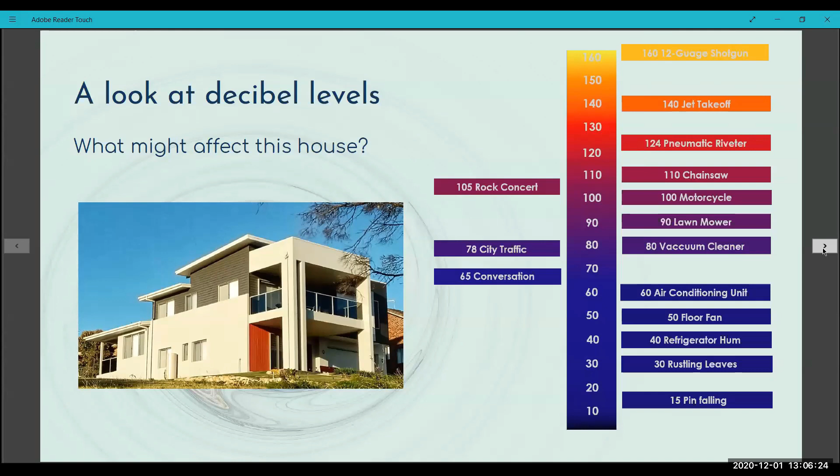The RW information is the same across the board, whether it's an aluminium window, a timber window, or a UPVC glazing. You'll notice that the RW figure has a couple of other numbers behind it in brackets.

That's referring to the frequency. So I'm going to do a little experiment with you now so you can understand exactly what frequency is.

I'm hoping you're all at home in a nice office tucked away where no one will hear or see you, so there's no embarrassment. Take a couple of fingers and place them against your throat and make a high-pitched sound - ah. I'm not going to make it too high, I don't want to deafen you. And then keeping your fingers in position, now make a really low-pitched sound - ah. Between those two, you should be able to feel the difference in the vibration in your throat, and that gives you a bit of a concept of what frequency is like.

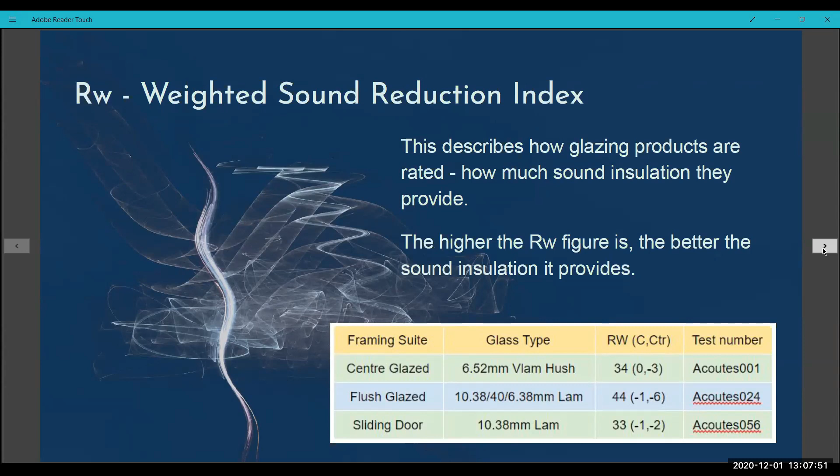In a sound wave, the frequency can be distinctly different. If you have a look at this information, you'll see that the frequency of sound changes over distance, as in a jet engine, and the proximity of where you are to it.

Now, in a sound wave, sound is actually on the global agenda due to health and well-being in general. Any long-term exposure over 85 decibels, which is about halfway between a vacuum and a lawnmower, is actually hazardous for your ability to hear - that's over the long term.

I think we've all visited minimalistic, sterile restaurants and cafes where you've got nothing on the walls, chairs that scrape, cups that clink, coffee machines that whir. Between that and a few jovial customers, it's really hard to hold a conversation. So what I'm trying to do is bring awareness generally to everybody to make a difference when they're actually looking at design.

There are Australian standards that discuss nominal acoustic protection. In New South Wales, it's suggested that the decibel rating for a bedroom is no greater than 35 decibels at night and 40 decibels for other areas of the house. This is just a guide, but one we can all bear in mind with design.

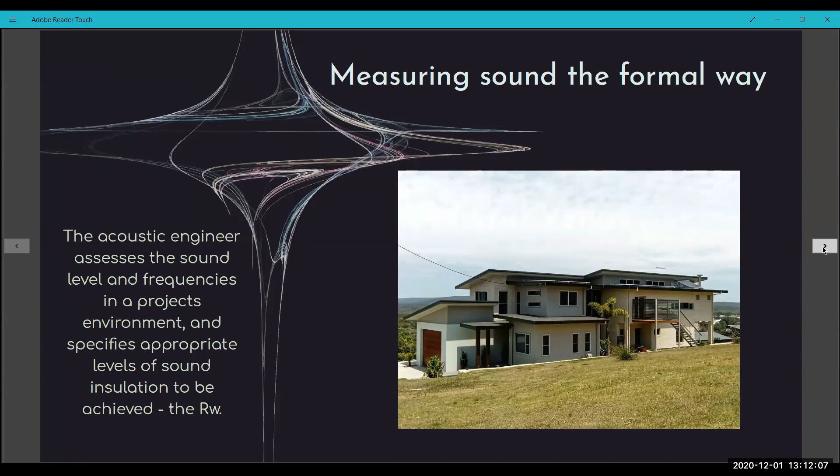So that figure will reflect, okay, you've got 2 figures then. You have the figure for the product itself, the glazing product, and you have the figure the engineer is requiring, which will reflect the RW and the CTR factors, and then you match the product up with the project you're working on. There is a standard that governs the testing, AS 5218, and it's the only standard currently affiliated with acoustic controlling and glazing, so it's one to be aware of.

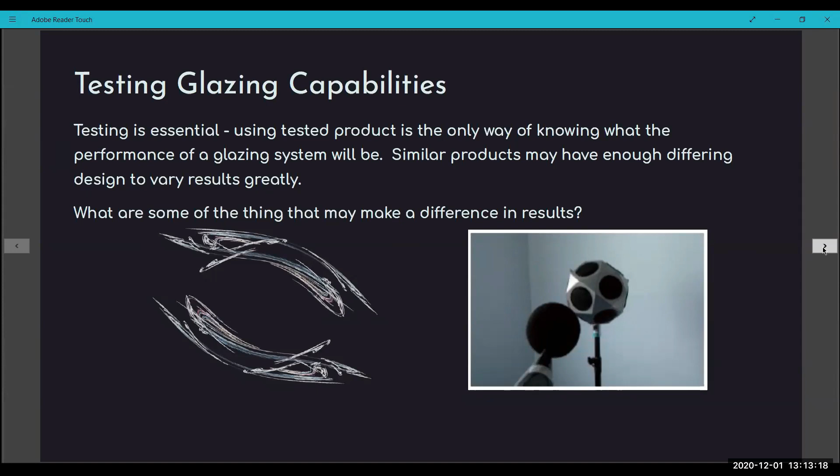In the initial stages of design, it is sensible to be aware of the appropriate frame types and potential glazing options. Think about a project you're currently working on. What do you think adds to the glazing's acoustic ability, or its weak points, that stop air movement getting through gaps and weak areas of design? Think about the frame material and the type of frame, the material wall thickness, the solidity of a frame as opposed to insulative chambers—both can be quite insulative.

The seals they use, whether it's gaskets, wool piles, or wet seals, the installation of glazing and drainage design—often there's little air gaps there that sound can get through. And the glass type, which Greg's going to talk about in a little bit, but I'm just going to talk a little bit more about the frame options.

So when it comes to glazing, a positive close is where one surface will close against another, flat to flat. This allows for better sealing and air isolation. If you think about sliding windows and doors or double hung windows, the sliding action doesn't allow them to close flat on flat, so unless they're specifically acoustically designed, that's going to be a problem area.

Then you've got hinge doors, not pivot doors, but hinged or bifold doors. They will close against an area, but there's still room for sound to get through. Awning and casement are the strongest operable glazing options, and if you consider the size of them, that gives you an indicator of why they are better at keeping sound out. The best of all that you could choose is fixed glazing.

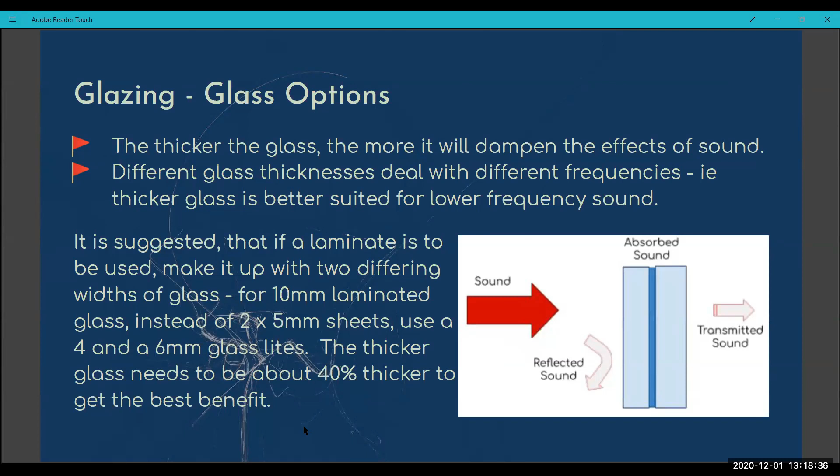Just to carry on from what Larissa was saying, there are a number of products that can meet these sorts of needs. Within our suite at Viridian we've got our acoustic VLam Hush, so a hush laminate is what we call it, but of course there are a number of other products across the market that will also meet that sort of requirement.

Basically it's got a specialized interlayer between the two pieces of glass that is laminated into the panel, so it holds the two pieces of glass together. That can become available in 6.5mm, 8.5mm, 10.5 or 12.5mm, and that's in an annealed format. In other words, it's two pieces of float glass, not toughened, that are laminated together by that 0.5mm special acoustic PVB interlayer.

So that can be very, very effective at cutting out noise. Now, another very effective way, as Larissa mentioned before, is to create a gap between glass, and that's where you can use an insulated glass unit. So that's a specially built insulated glass unit, and the bigger the gap, the better the acoustic performance. Of course, you can also use secondary glazing options, where you've got the outer glass framed in, then a 100mm gap, and then another piece of glass glazed on the inside of the area. So basically you're creating a large air gap between the glass, which creates really good sound insulation.

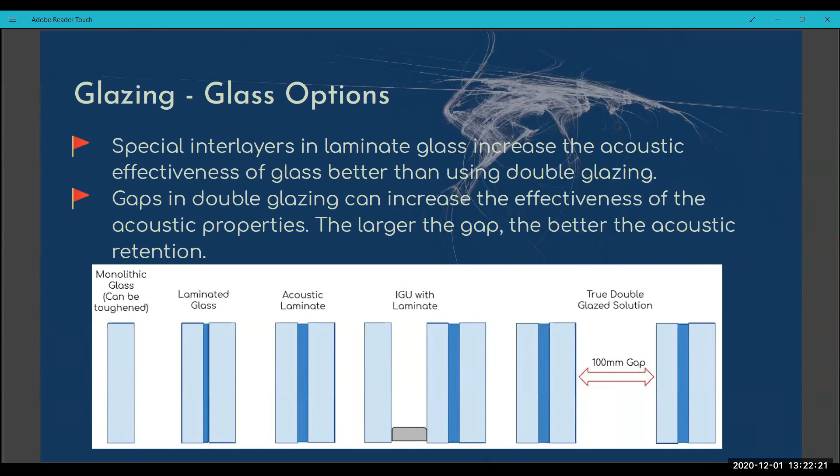Just so you're aware, there's some really good information available on our website that can help you work through a lot of the glass options available to you, at viridianglass.com. That can be very helpful to work through what glass options are available and the different performance data associated with them, whether that be single glass, laminate, 6.5 millimeter as an example, or going into the double glazed IGU unit. All that data is available on our website for easy access.

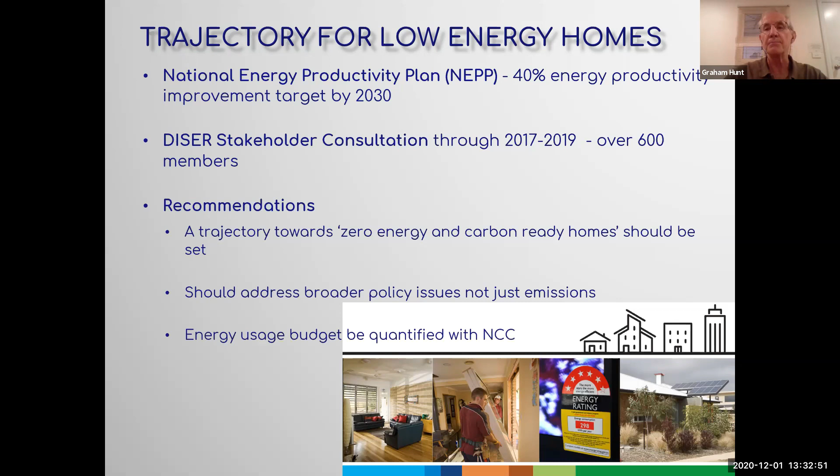That trajectory should address broader policy issues and not just emission reduction. So other concerns here were about the cost of energy to consumers, about health and amenity issues, which is becoming a more crucial thing as we face the stresses from climate change, the heat wave we're going through at the moment. It was interesting, there was a report on the radio yesterday that the ambulance service over the weekend were as busy as they were at Christmas or New Year. It's a little known fact that deaths from exposure to heat is one of the highest killers we have. And so there's a concern to improve the performance of housing to minimise those impacts.

The third recommendation was that the energy usage budget be quantified within the National Construction Code.

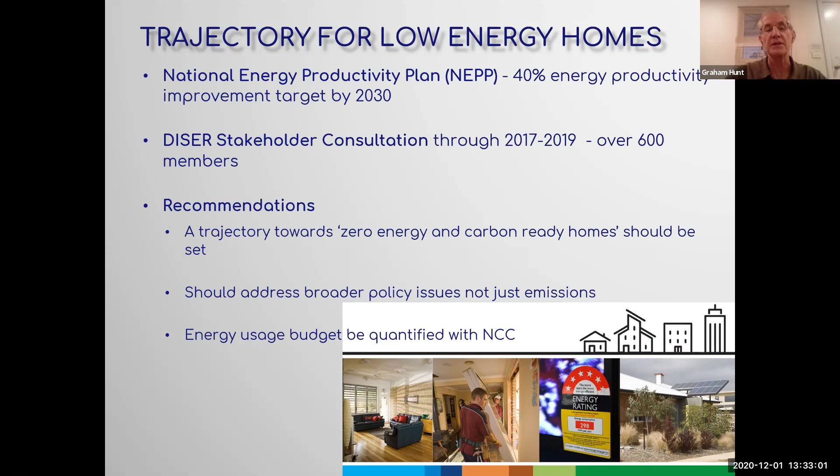COAG, which no longer exists, is now replaced by the National Cabinet, but in December 2018, they adopted the recommendations of the trajectory, and there's a report about how it applies to homes. It also covered commercial buildings and new homes.

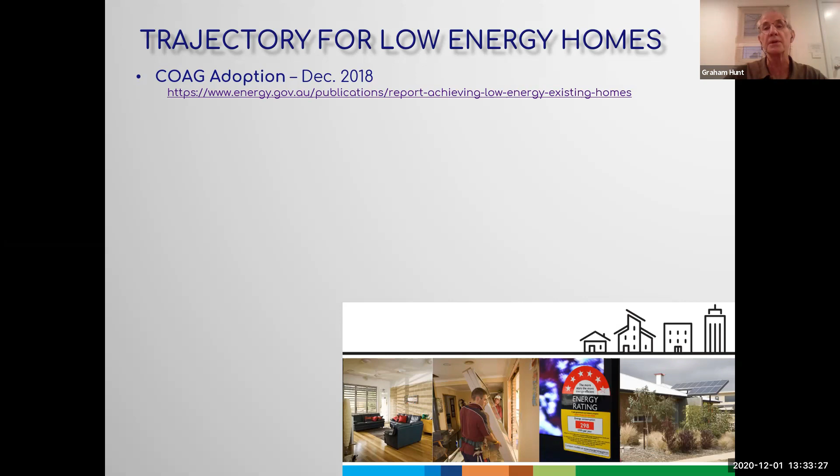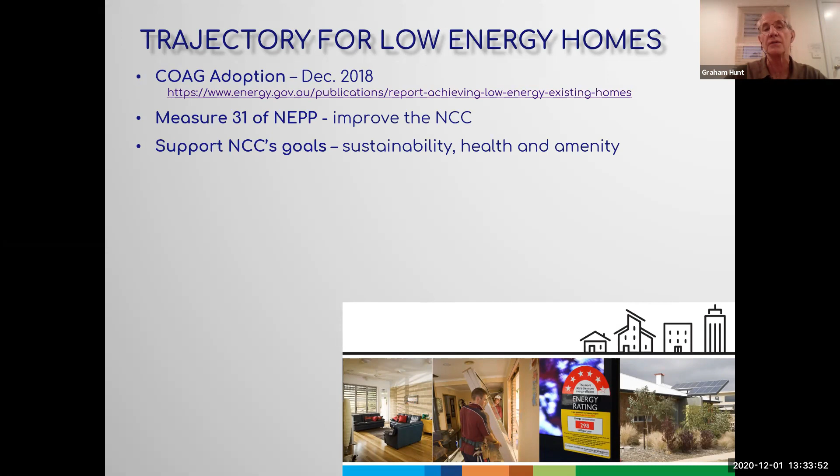It's a result of Measure 31 under the National Energy Productivity Plan, setting the agenda to improve the NCC to achieve the 40% productivity improvement. This is in line with the overarching National Construction Code goals of sustainability, health, and amenity.

There was a lot of work done prior by ASBEC and Climate Works as background for the trajectory, and I've got the references there for those two reports if you want more background. I can make a copy of this presentation available so people can access those links.

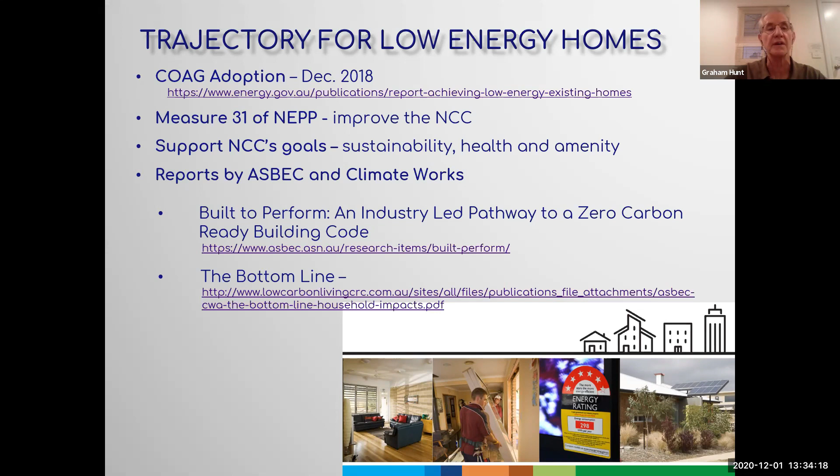Regarding the proposed changes that are going to occur in 2022, because of the extent of the changes they have been delayed. Normally they occur around May in the calendar year, and that has been delayed to September 2022 because of the amount of development work still to be done.

One prime reason for these changes is that there's been no real increase in the stringency of residential energy efficiency within the National Construction Code since 2010, which is 10 long years. That's when the 6-star NatHERS requirement was introduced. So there's been a strong feeling through industry and the community that this increase is long overdue.

In mid-2019, the Australian Building Codes Board released a scoping study of how these changes could be incorporated into the NCC, and there's a link to that study there. The outcome is primarily that new dwellings will be aiming to achieve net zero regulated energy, as well as a minimum 7-star NatHERS rating.

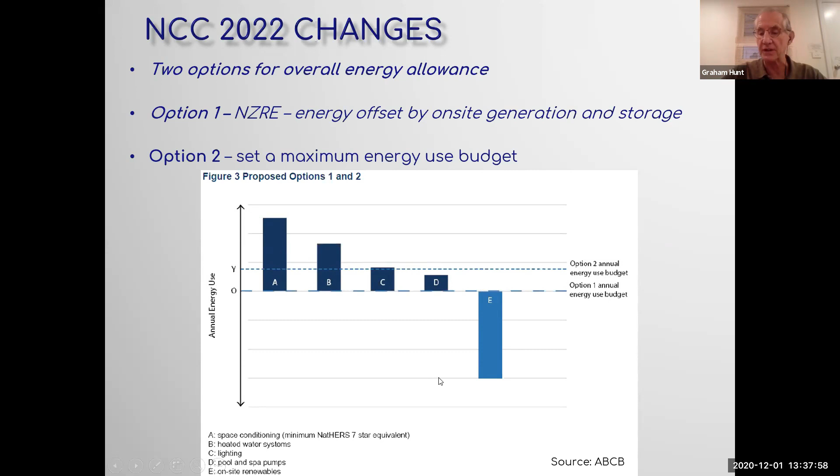So allied with adding all these energy assessment requirements into the NCC, it was realised that the Nationwide House Energy Rating Scheme needed to expand. Currently, it only rates the building envelope, the thermal performance of the building envelope. It doesn't consider or model the overall other energy uses within the home.

So the NatHERS tools are being expanded to include these whole of house elements. There already were some tools available. Practitioners within New South Wales who are familiar with BASIX would be aware that it already covers energy use in terms of the selection of hot water, heating and cooling systems, lighting options. So it has been considered as one model.

The AccuRate CSIRO NatHERS tool is being expanded to include these other elements. Currently the testing of those tools is underway. The other thing that needs to occur is the NatHERS assessors need training in these new modules of the tool. Currently the strategy and courses for that training is underway, and that training will occur next year and early into 2022.

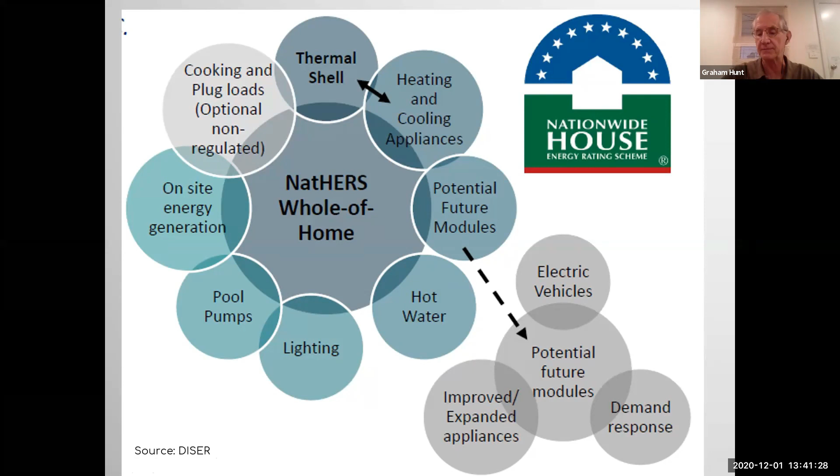Just quickly, in terms of some of the appliances and things you need to consider. Obviously there's a range of options with hot water, but you're going to get more benefit in your assessment if you choose a more efficient system, such as solar hot water, evacuated tube, or a heat pump. Where the hot water system is placed within the building can affect the efficiency in terms of minimising pipe runs, but also whether it's a good position for the performance of the system.

You need to think about hot water pipe insulation, something which is quite often overlooked in the residential area. And selecting efficient sanitary fixtures, efficient shower heads and so forth. They have developed a lot in recent years. You can now get quite good 4-star shower heads, which are a rain shower head.

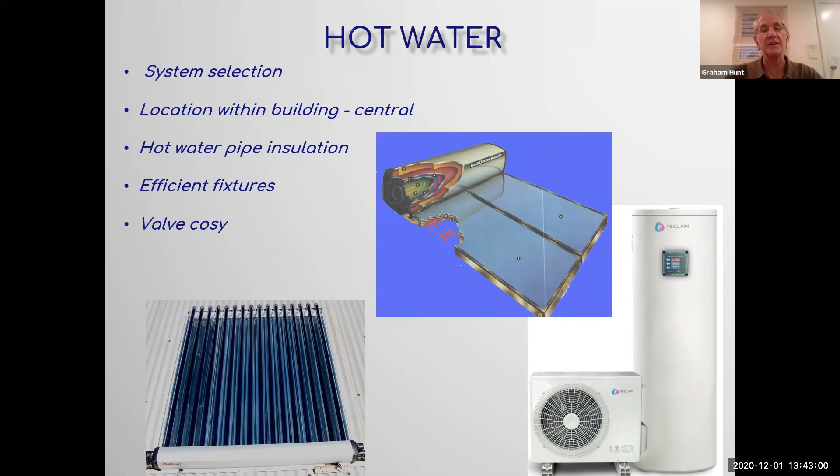A valve cozy is a concept - it's an insulated cover to go over the pressure relief valve of a hot water system or tank that can lead to heat losses. And you also need to think about hydronic and pool heating and the efficiency of those systems for heated water systems.

Heating and cooling, this is a big area, but the first thing you can do is design an efficient building and get a good NatHERS rating. I spoke at the conference about going beyond the minimum and trying to achieve 8-star designs or more. The benefit of doing this is that you then don't have to put in as big an air conditioning or heating and cooling system, and it will run much more efficiently.

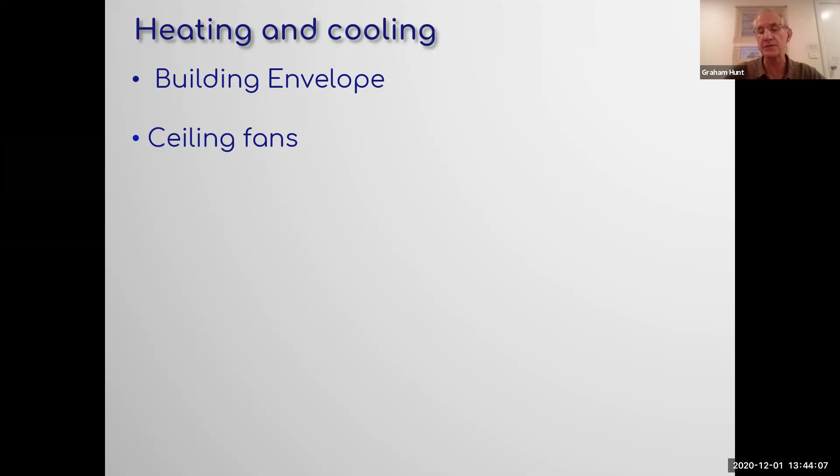The benefit of ceiling fans in tropical and warm, humid climates is very beneficial, and even in all climates for summer cooling. There's more under the new deemed-to-satisfy provisions in the NCC 2022 - you'll see ceiling fans probably figuring more prominently.

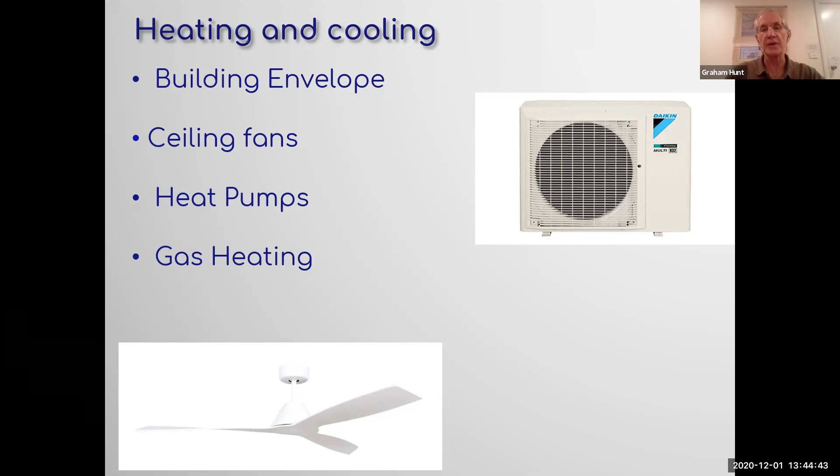Heat pumps, we're very familiar with these, but they are very efficient in that they take energy out of the air, and in terms of their conversion of energy to heat, are very efficient. Gas heating is still used a lot in southern states, and the efficiency of newer systems is quite good, but you have to ensure that they're installed properly, especially the ducted systems.

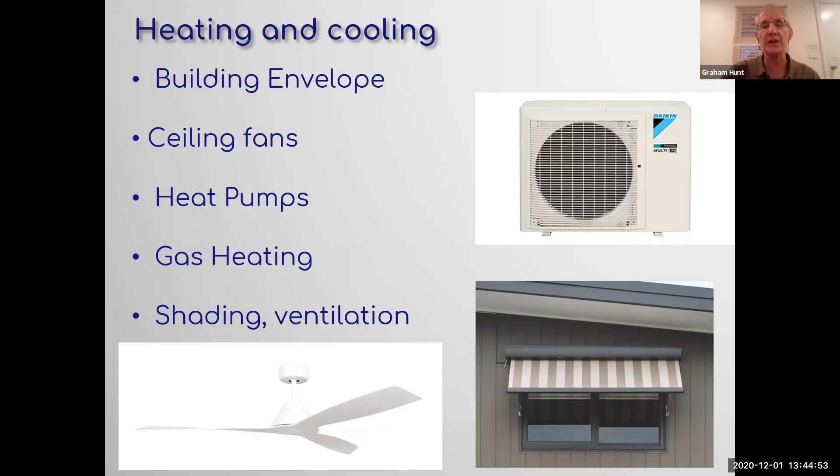The use of shading and ventilation can certainly help to reduce the demand for cooling. Pools and spas will also factor in.

Be aware that pool pumps are going to be energy rated from next year as a minimum. They'll all be rated, so you'll be able to choose quite easily which are the more efficient pumps, and the efficiency of these pumps has expanded significantly during the last decade.

We did discuss the heating options. Perhaps using heat pumps is a consideration, especially if you're needing to install a PV system to meet your energy budget. These can work in conjunction with a heat pump to ensure that you can get a heated pool with minimal emissions and minimal cost.

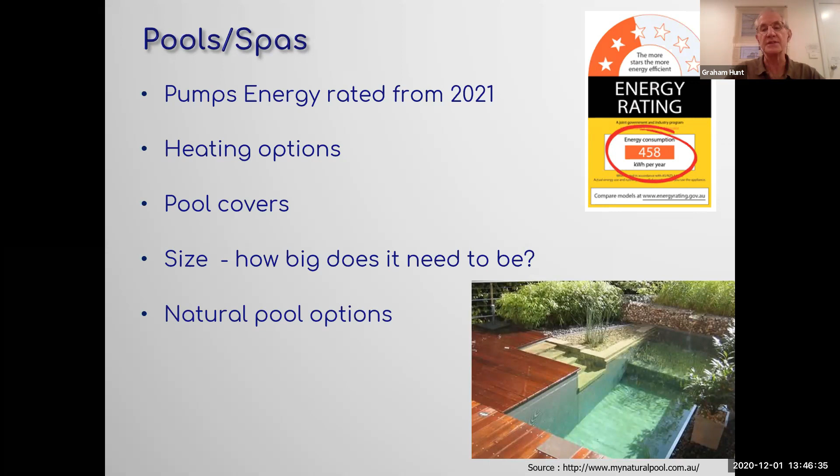Pool covers help to contribute to minimizing evaporation and keeping the heat in, so it's not escaping. And consider the size of a pool, because obviously the bigger it is, the more energy it needs to consume to just circulate the water, but also for heating. There's also now quite a few options around natural pools using reed beds and other options, which can reduce the energy demand and be better for the environment.

I'll just briefly cover a discussion about choosing between electric and gas appliances. I've borrowed this from Renew - I'm not sure if you're familiar with them, they used to be called the Alternative Technology Association. They publish the magazines Renew and Sanctuary, and they've done a lot of research about the benefits of converting to an all-electric home. This is just results of some of their research.

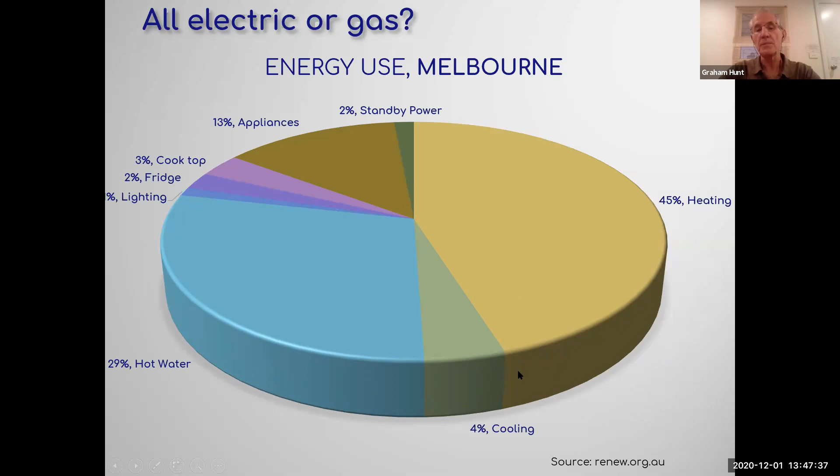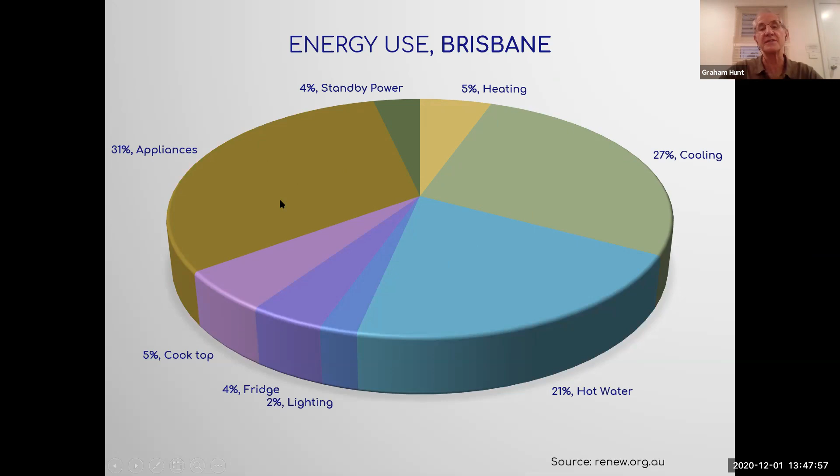This is a summary of overall energy use in a typical house in Melbourne, and you can see that heating is the biggest component, along with hot water. The next one is a typical house in Brisbane, and you can see heating is significantly reduced and cooling is more important. But the overall component for heating and cooling is significantly less, meaning that your appliance load proportionally becomes bigger.

But there are some things not quite covered in these figures. One is what's called fugitive emissions, which is where you get gas leakages from the reticulation system. We have an aging reticulation system, and it's also through the production and movement of gas through pipelines. So that has not traditionally been fully included.

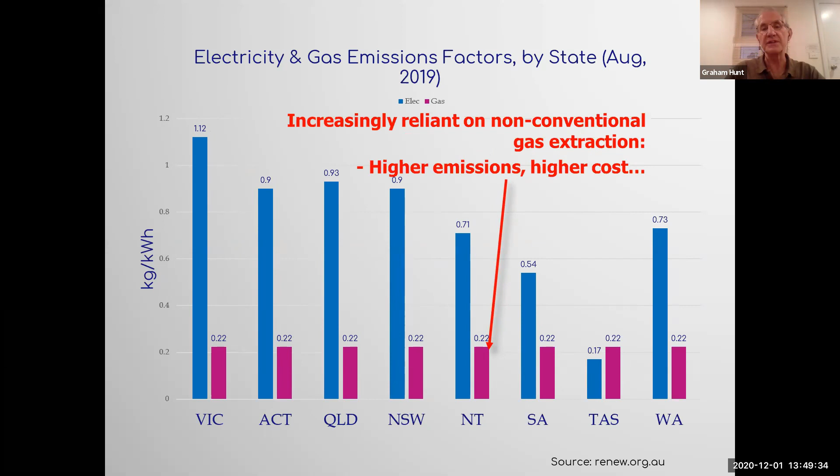More increasingly, our gas - we no longer have the Bass Strait gas fields, and we are relying more on non-conventional gas extraction, coal seam gas and so forth, which leads to higher emissions and higher cost in terms of delivery of the gas.

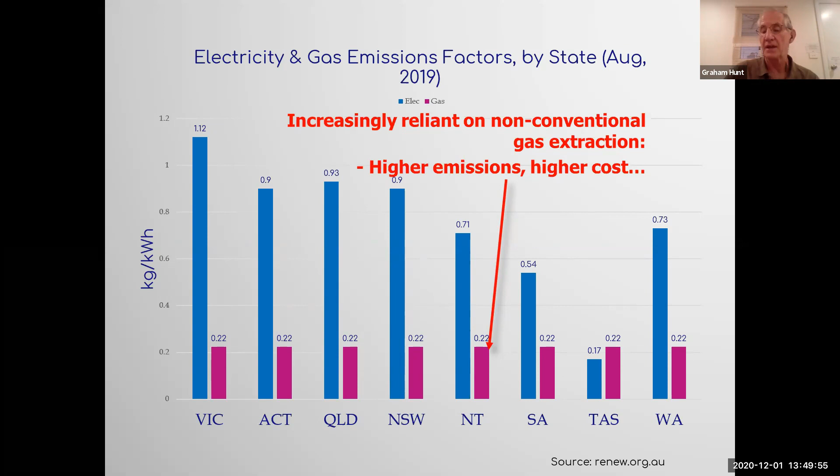And the other thing it doesn't include is that any on-site solar PV production will minimise the emissions, and the fact that the electricity market is transitioning to becoming greener - that has been happening fairly slowly, but it is going to speed up.

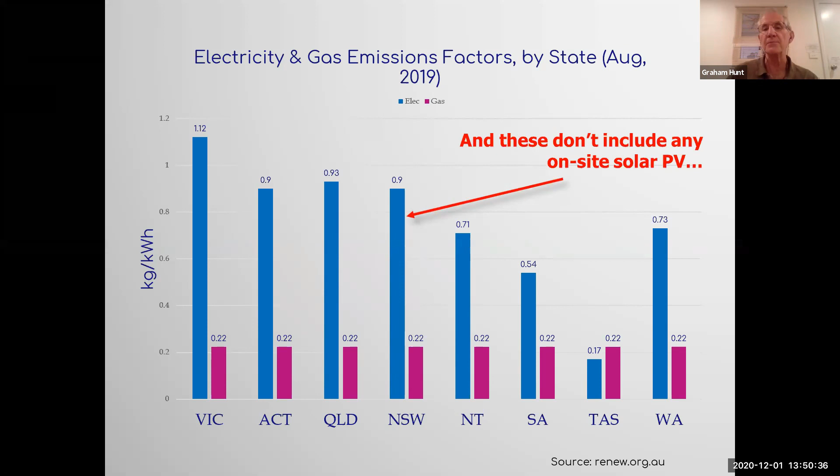We've recently had states such as New South Wales committing to a 70% reduction to using renewable energy by 2030. So you'll find over time the higher blue columns will start to come down.

But the other thing that comes into play is the efficiency of the appliance. You're probably familiar with the coefficient of performance, or the EER measure of equipment, and that's the relationship of the energy in versus the energy out.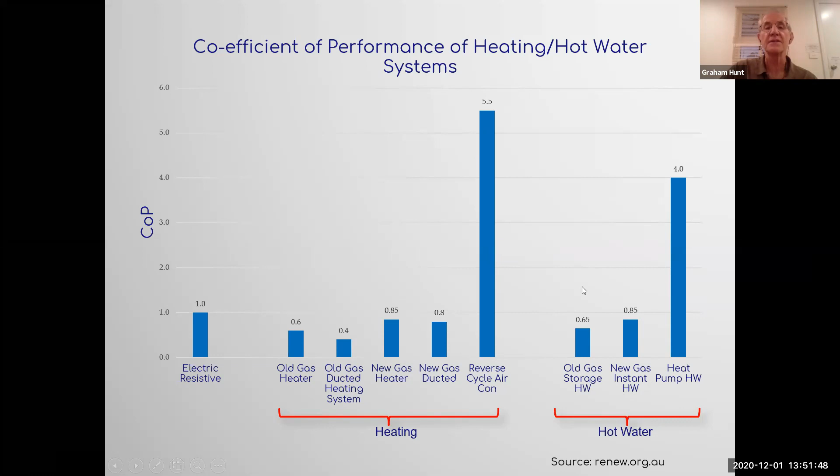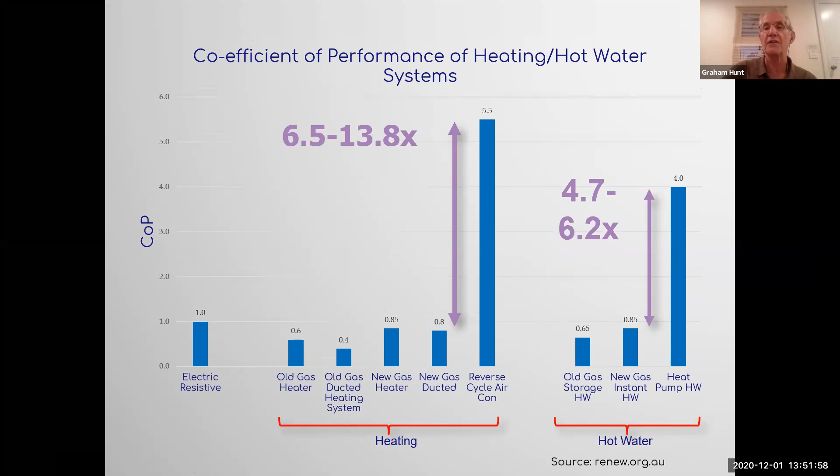The same applies to hot water systems, and you can see an electric heat pump is significantly more efficient. That's the gauge of the extent of the improvement in terms of the amount of actual energy you're consuming to get your heat or your cooling.

So as summarised here, gas can be 1 to 3 times less emissions than electricity, but electricity can use 4 to 13 times less energy than gas. So switching to electricity will, over time, lead to savings, and as we go to a greener grid, those savings will increase.

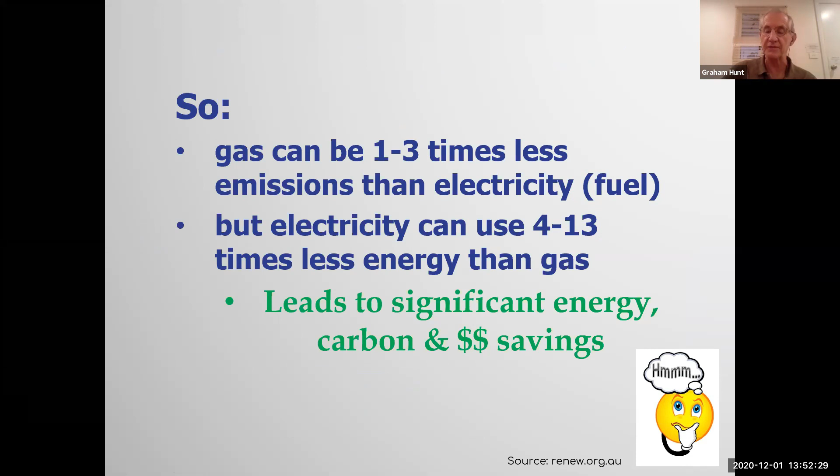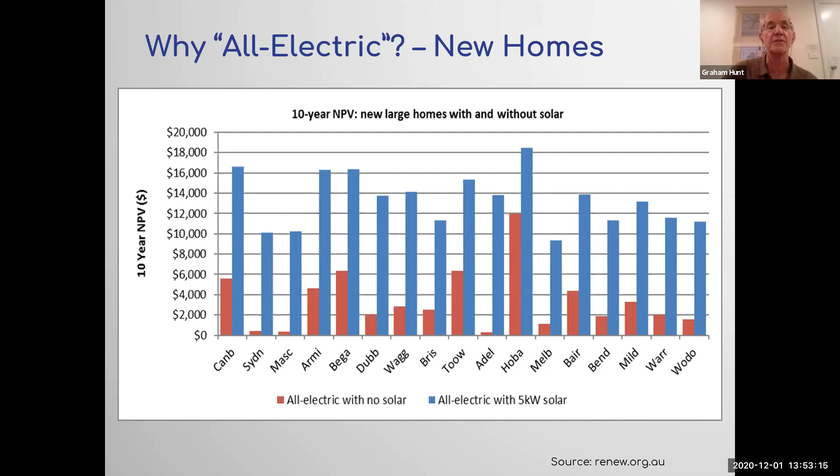This is the same sort of research explaining what can be achieved with existing homes, in terms of whether the home is large, medium with someone at home during the day, medium and out during the day working, or a small home.

Again, in the colder climates you can see there's significant savings. In the southern states there's a lot of gas heating still being used, ducted gas heating, but at the same time a lot of those houses have fitted reverse cycle air conditioners for cooling. They would save a lot of money if they used the reverse cycle air conditioning for heating in winter and perhaps turned off the gas.

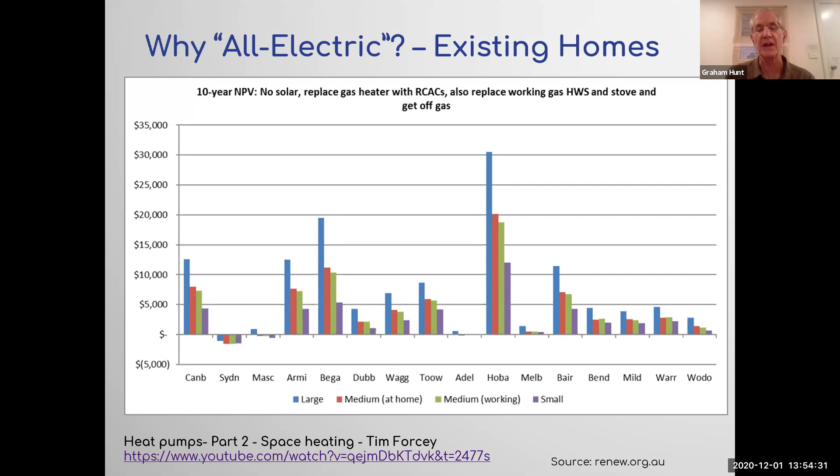There is an interesting presentation by Tim Forcey, who's from the Facebook group My Efficient Electric Home. That was a presentation he did for Renew, and it gives a much clearer explanation about the benefits of using heat pumps.